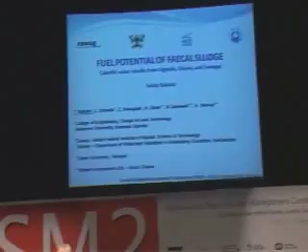Thank you so much, Dave. Teddy Nakato, and specifically I was looking at the fuel potential of fecal sludge, and in this I was characterizing the calorific value of sludges from 3 different cities in Africa.

This is just a part of a big project called the FaME project, Fecal Management Enterprises. This project is carried out by 5 countries and 6 partners: Austria, Switzerland, Senegal, Ghana, and Uganda.

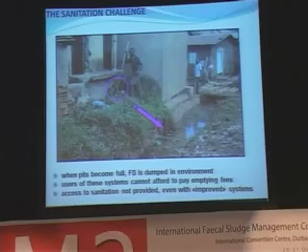We all know the sanitation challenges in developing countries. When pits get full, most of the sludge is dumped into the environment or trenches, and when there are floods, this creates health risks. This is because most people cannot afford paying for emptying, or even those who try still have accessibility problems, like not being able to access the latrines or trucks not being able to get through, so there's a big challenge. Even with improved systems, sanitation is not provided in the communities.

So there is a need to manage the fecal sludge from on-site sanitation, and we are looking at adding value to the end product. This would help remove the fecal sludge from the communities, and also would ensure adequate treatment.

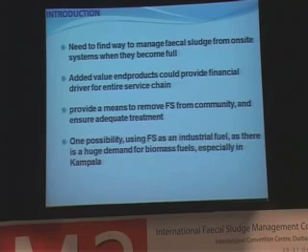One of the possibilities we looked at was using fecal sludge as an industrial fuel, a fuel that could be used like any other biomass fuel in industrial processes, because there is big demand in most of these cities. We hope that since fecal sludge is readily available and renewable, it could easily be used to co-combust with available fuels, or even replace the use of fuels.

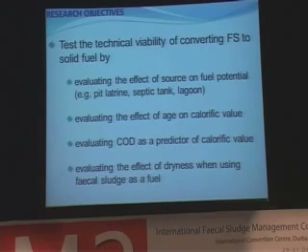So in this we tested the technical viability of converting fecal sludge to solid fuel by evaluating the effects of the source of the fuel, like fuel from pit latrines, septic tanks, and lagoons. We also looked at the effect of the age of this fecal sludge on the calorific value of the sludge.

We looked at predictors of calorific value like COD, and also evaluated the effect of dryness on the fecal sludge, because it's important to deliver this fecal sludge drier so that it can be used by industries.

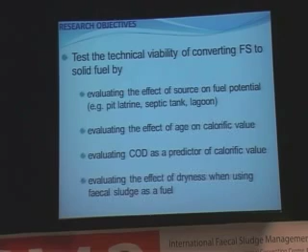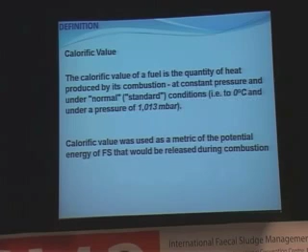So calorific value is the main metric that we used to determine the potential energy of the fecal sludge, and this is mainly the quantity of heat produced by combusting a fuel.

In this study we were comparing results from 3 different countries: Senegal, Ghana, and Uganda. Specifically we looked at Kampala in Uganda, Kumasi in Ghana, and Dakar in Senegal, comparing fecal sludge from West Africa and East Africa.

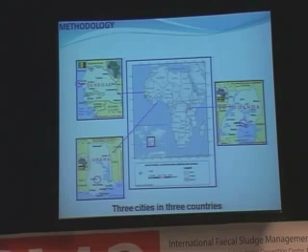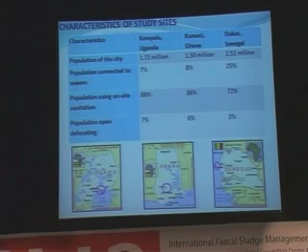These 3 cities all have a population of over 1.5 million people, with Kampala having 1.72 million and Dakar 2.51 million. The population served by sewer lines is about 7% in Kampala, 8% in Kumasi, and 25% in Senegal. The biggest population is serviced by on-site sanitation systems, with 86% in Kampala and Kumasi, and 72% in Dakar. In all 3 cities, we still have a problem of open defecation, with 7% in Kampala, 6% in Kumasi, and 3% in Dakar.

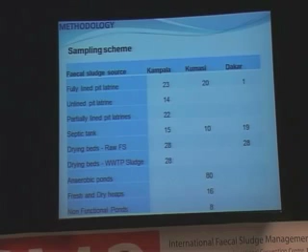We also looked at fecal sludge from drying beds, which were filled with raw fecal sludge directly from trucks, and also sludge from wastewater treatment plants. We also looked at sludge from anaerobic ponds, and then fresh and dry heaps—these are heaps of sludge excavated from anaerobic ponds—and there were also some non-functional ponds that were sampled. So this is just the source of our sludge.

We got sludge directly from the trucks, and then from the drying beds, which were filled with raw fecal sludge from the trucks, and then sludge from wastewater treatment plants, and from anaerobic ponds and heaps. From the drying beds, we sampled on the first day.

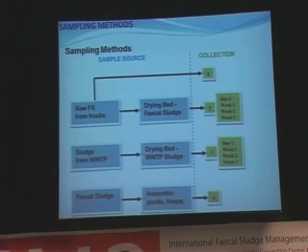The beds were filled, and then sampled for 3 consecutive weeks to compare the effect of dryness on the calorific value of the sludge. We can see how the samples were collected: trucks were followed to the point of collection, just to ensure that a particular category of sludge was collected.

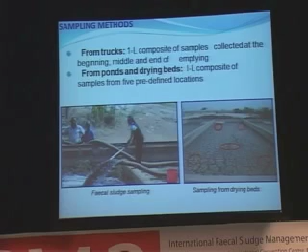They were followed back to the disposal sites, and samples were collected at the beginning, midway, and at the end of emptying, and a composite sample was made. From the drying beds and ponds, we picked samples from 5 different locations, and a composite was made, and this was delivered to the lab, where several parameters were tested.

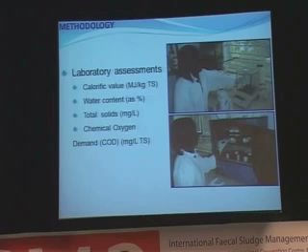We have calorific value, water content, total solids, and COD, amongst others.

From the results, we compared sludge from septic tanks and fully lined pit latrines across the 3 cities, and we realized there was no significant difference by type, that is, sludge from septic tanks and fully lined pit latrines almost had the same calorific value with no significant difference. Also, in comparing sludge from different cities, we still found the difference was not that big in terms of calorific value.

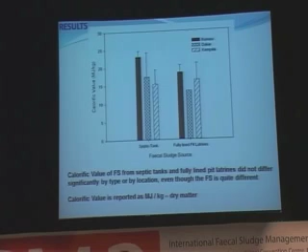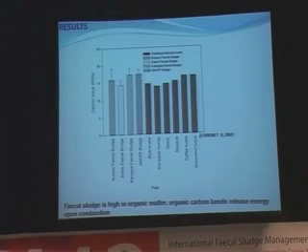We also compared the age and looked at how it affects the calorific value. We looked at samples from septic tanks, unlined, fully lined, and partially lined pit latrines. We realized that the age of the faecal sludge did not significantly impact on the calorific value.

This is very unusual, because we expect some degradation, so we think probably there are some complex organic compounds that were degraded slower or not degraded. We think we'll have to do more research on this and see which compounds these are and what type of energy they give off.

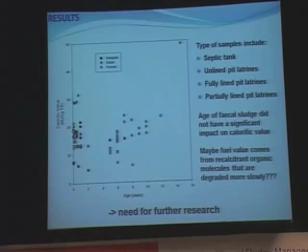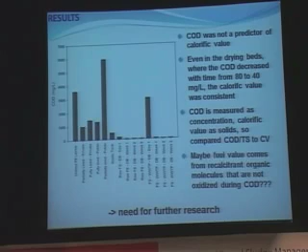We also looked at COD as a predictor of calorific value, and we realized that even when in the drying beds there was a reduction in COD from about 80 to 40 milligrams per liter, still the calorific value was consistent. So we still think there are probably some organic complex molecules that were not oxidized during the COD test. We hope we'll look more into this and find out which compounds are resistant, because they have an energy impact on the process.

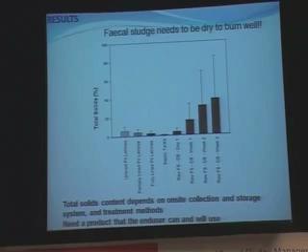Fecal sludge for industrial processes needs to be drier for it to be used. We looked at the total solids of this sludge, and looking at our results, septic tanks mainly have very low total solids. This is because they receive a lot of grey water as compared to other pit latrines like the unlined, which have leaching and drainage of this water into the soils.

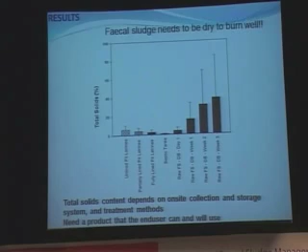So they have a more concentrated fecal sludge compared to that of septic tanks. From the drying beds, you find that the total solids kept on increasing with time because of the drying over time and space, in order to improve on the energy balance. But the form and dryness of this fecal sludge is definitely important for its use in various industries. This will determine the different treatment processes that should be carried out.

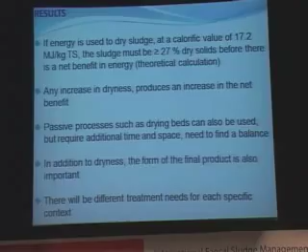You find that some industries want the sludge as powder, others need it as pellets, depending on the usage or the kilns being used, or if they are to be used in improved stoves, so they need it in different forms. That also determines the different treatment processes that should be carried out.

So in conclusion, the calorific value did not vary significantly with the source of this sludge, like from pit latrines or anaerobic ponds. And also the age was not a predictor of calorific value.

Calorific value of fecal sludge compared to other biomass fuels competed well and is similar, which means it can easily be co-combusted with these biofuels, or it can even be used to combust in various industrial processes. COD was not a predictor of calorific value in this case, but we also realized that the dryness and form of this final fecal sludge is very important for the use and profitability of using fecal sludge as an industrial fuel.